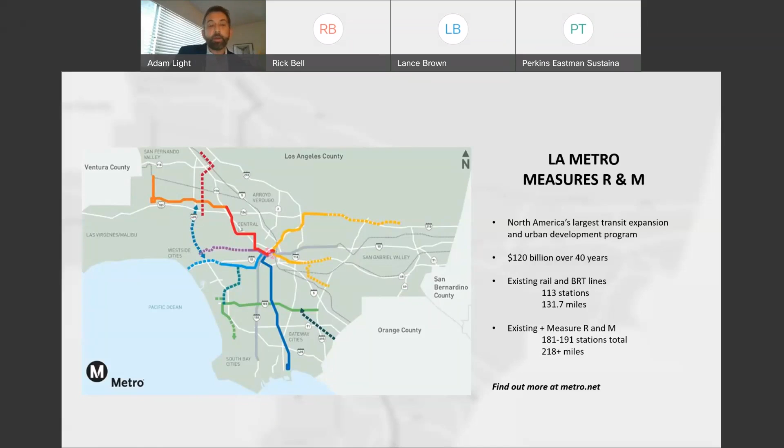All across the county, currently we've got existing rail and BRT lines that have 113 stations and extend for over 130 miles. With our Measure R and M projects, we'll have anywhere from 181 to 191 stations, potentially more, and 218 miles of transit corridors. This is just a cartoonish map to give you a quick idea of the extent of the transit system we're building across LA County. It doesn't include everything, but just to give you an idea.

Metro has a long-range plan, a strategic plan called Metro's Vision 2028, and today there are 5 goals to that plan. Today we're focusing on the second goal, which is to deliver outstanding trip experiences for users of the transportation system. If we don't get people on transit, it's not going to help our environment, and it's not going to help people get to where they want to go.

So we want to make sure we're taking people where they need to go in the best way possible on a state-of-the-art system. There's a number of things we're working on now. We just transitioned from a color-based line naming convention to letters. We wanted to emulate New York City in that way, since you've got a great system of naming your lines. As our system is growing, we've adopted that. We've also got quite a number of new Measure R and M transit corridors opening in the next 6 to 7 years in time for the LA Olympics and to better serve our existing residents and visitors.

Metro has a new focus on equity and customer experience, making sure that we are serving the folks in our county that need the transportation the most, who are the most vulnerable, and that we're supporting and helping the economic development of equity-focused communities.

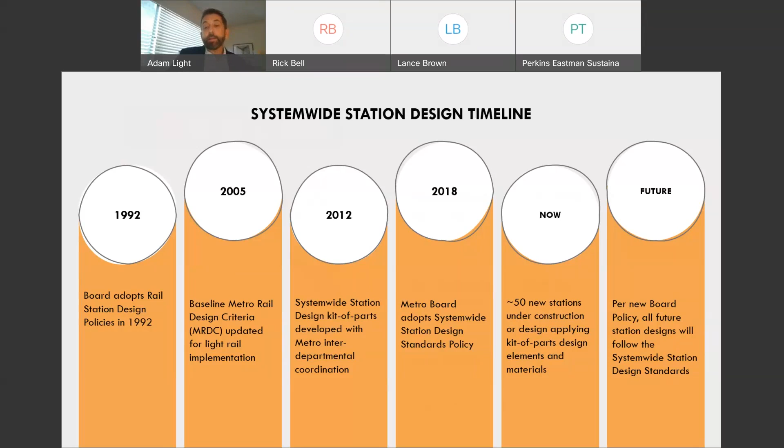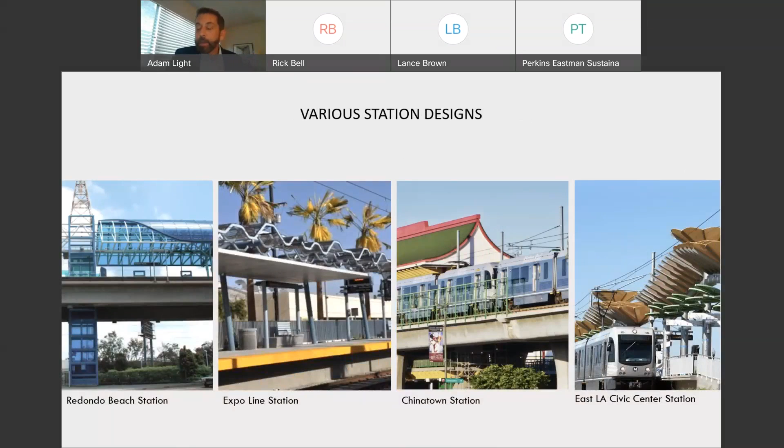Currently, we've got approximately 50 to 60 new stations under construction that are applying the kit-of-parts design elements and materials. The reason we developed it is because on Los Angeles' system, we have a very exuberant collection of architectural styles. This shows a few of those at Redondo Beach, a station that looks like a wave, in Chinatown, a pagoda-style shelter, and out in East LA, sculptural elements that mimic palm trees and other elements that are in the community.

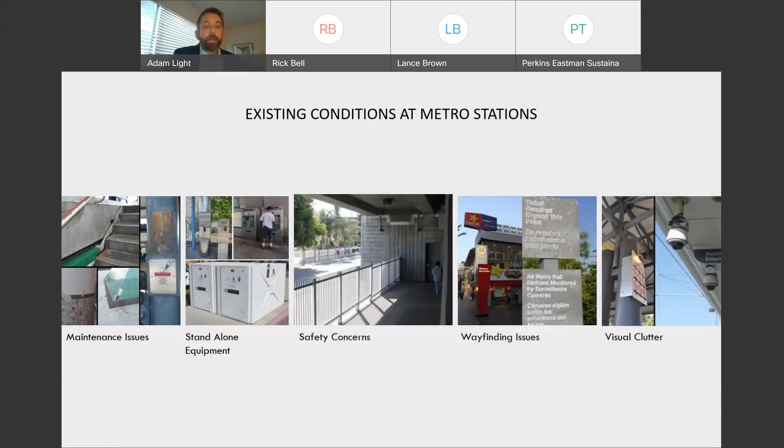So in trying to maintain all of these different architectural styles, we had trouble keeping up with different architectural elements and finishes. We also had station platform designs that resulted in dark areas and isolated spaces that our customers don't really feel safe in. A lot of our elements, signage, and equipment was hard to maintain and keep up to date. So we wanted to move to a more modular system.

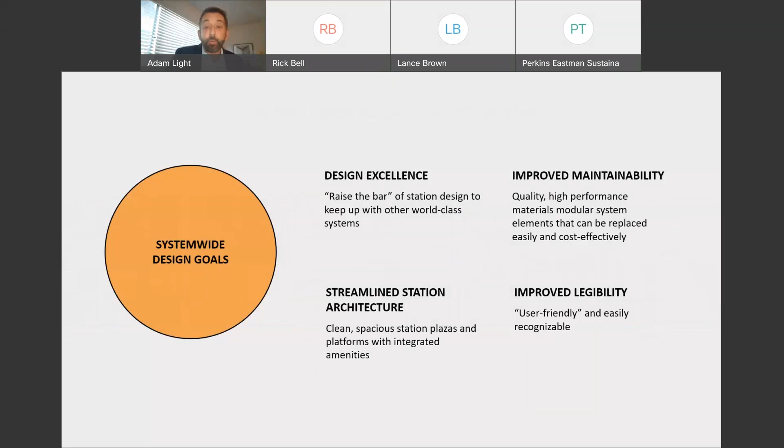The idea with our system-wide design goals is that we push design excellence, we raise the bar in design, we improve the ability of our agency to maintain our stations at a high quality, and that we streamline our station architecture so it's easy to recognize from a distance, easy to move through, intuitive, and creates a better user-friendly experience for anyone using our stations.

So what we did was we looked at global best practices around the world, in DC, in New York, across Europe, in Asia, and we found some commonalities on the best station architecture and best practices around the world.

What we learned from these best practices is that the materials you use in a station obviously have to be durable. They have to be flexible to be used in different ways for different station types, different ridership numbers, and different communities. They also have to be accessible. The people who rely on our system the most need to be able to access the station and access the trains. All of that is for nothing if we are not able to maintain it.

What we also learned is that the best stations are well integrated. All of the features and customer touch points are well integrated into the station architecture. And ultimately, it's got to be cost effective to design, to build, to operate, and to maintain.

So what we found through this best practices research is that there are 3 basic materials found in the best state-of-the-art transit stations, and that's architecturally finished concrete, brushed stainless steel, and structural glass.

But we wanted to put a design together that actually reflected LA and the unique things about our community. We wanted a light, air, and openness feeling to our stations so that people can enjoy our climate, but that also protects riders waiting on a train from our hotter months, hotter temperatures, and direct sunlight. We want to enjoy that climate, but we also have to provide some protection from it.

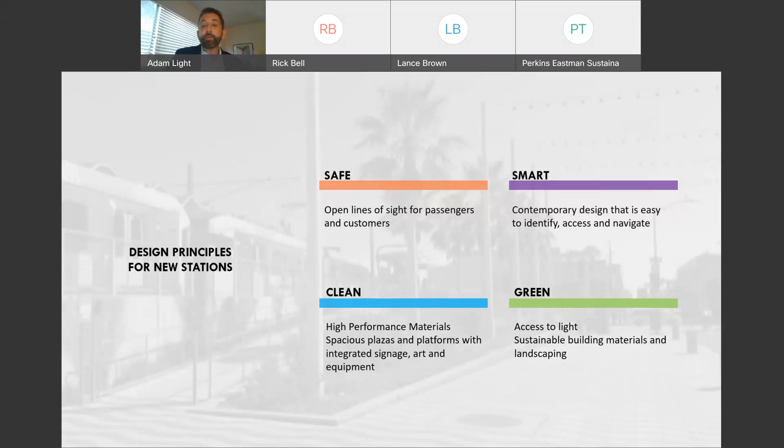Using those high-performance materials means we have to replace materials less, and using sustainable landscaping materials also contributes to the health of the environment. In terms of our principles, we have consistent architecture and signage that's easy to recognize station to station, but we provide variability to each station through art and landscaping. Our art program ties each station to the culture of its surrounding community, and the landscaping is tailored to each microclimate that we have in LA.

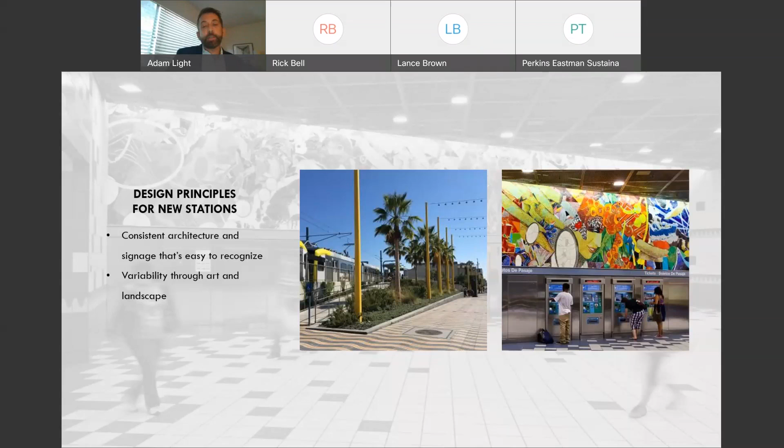If you're at the ocean, it's a lot different climate than if you're in the San Fernando or San Gabriel valleys, where it's much more dry and hot.

So this is just to show you some photographs of how we put this kit of parts together: the glass, the concrete, and the stainless steel.

This is a rendering of a subway station entrance. We have a bunch of these under construction right now along the Wilshire Boulevard corridor, downtown, and along Crenshaw Boulevard. This uses the glass panel system to construct an entry pavilion.

The same type of materials are used for the elevator accessible entrance. We use stainless steel for our bike racks, for the enclosure that secures the station, for the columns. And then we use a 3-toned concrete pattern for the paving of the plazas.

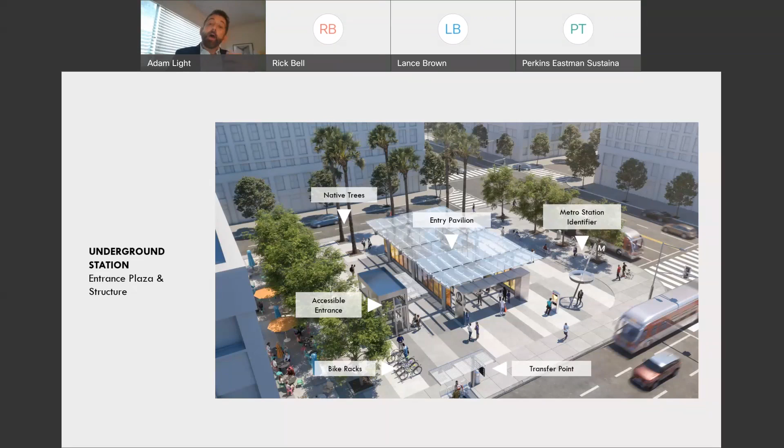What we found is that over time, it's very difficult to keep up individual pavers or very intricate patterns of paving. So we went to a randomized 3-tone gray concrete paving pattern that, so long as it's patched in a regular rectangular shape, future repairs to the plaza surface are camouflaged through that randomized pattern.

So this is a close-up, and you can see here the art glass panels that we provide at the entrance to our underground stations. This helps welcome people to the community as they exit the station, as well as immerse our riders in art as they go down into the underground station.

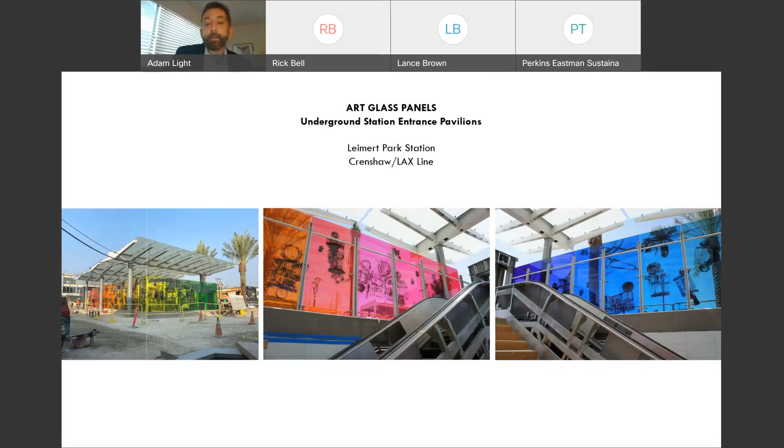So it's a very colorful, beautiful art piece that will welcome people to the community and instill a sense of pride in the surrounding community and the artists that come from this area.

So these art pieces are meant to tie the station to the community and immerse our customers in beautiful art.

This is a rendering of our at-grade stations, and again, we're using the kit of parts with the stainless steel and the glass panels. To the right of the rendering, we're using that same panelized glass panel system. It's a fritted glass that provides shade.

Depending on where you are in the county, that frit may be more dense depending on how hot the climate is and how much density of shading we need.

You can also see we've got art panels that are integrated into the architecture and welcome people to the station. They are out of the touch zone to prevent vandalism, and they're highly visible to the surrounding community. So these stations become art pieces and architectural pieces within the midst of the community.

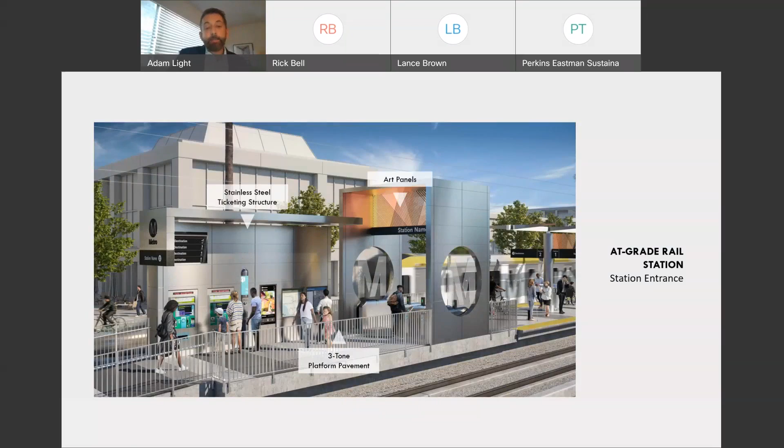So we're really excited about these new at-grade stations. You can also see the stainless steel ticketing structure, which if you look at it close up, streamlines all of the equipment that people need to ride the system, from navigation to next train arrival to the ticket vending machines, customer assistance telephones, and static map cases, as well as integrated touch screens that allow people to navigate the system.

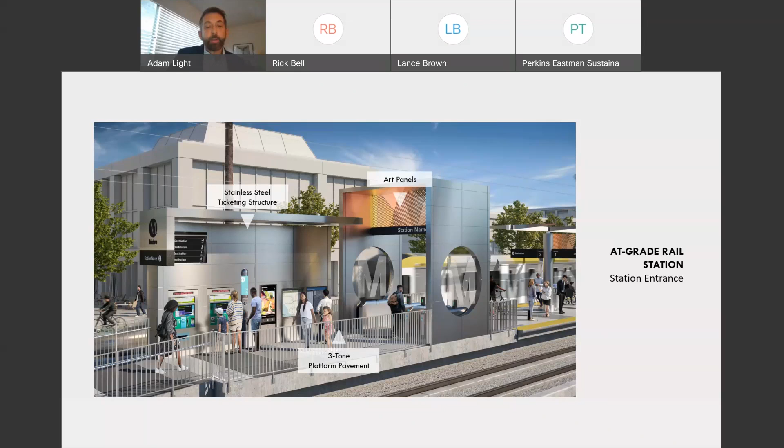We wanted that in a streamlined enclosure so that we don't have places for trash to gather, for people to stash things, and we just wanted a much more state-of-the-art appearance to the entrance of the station.

This just shows some mock-ups of the 3-tone concrete paving and the integrated LED lighting fixtures that are in the outriggers that either support the canopy or provide lighting on the portions of the platform that don't have a canopy. And this is to show you some of our new downtown stations that are under construction and should open next year.

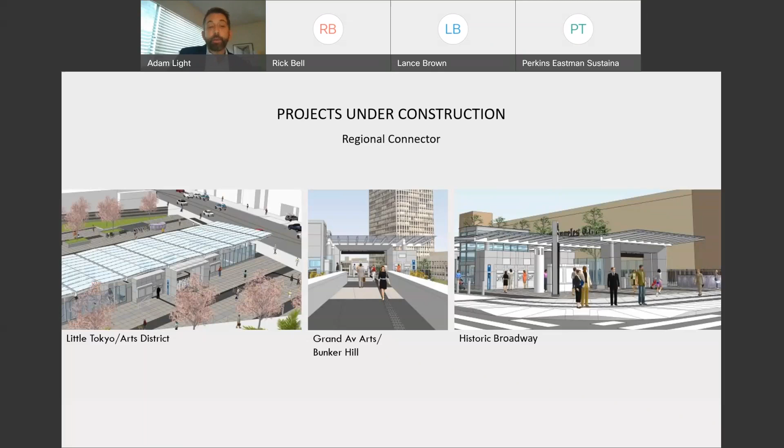This shows how the kit of parts can be put together in different configurations to respond to site conditions. These stations don't have concourses for the most part because of the shallowness of the alignment through downtown. So we had to put a lot of the customer amenities for these underground stations at grade, and we were able to use the kit of parts to create a different configuration.

With our design standards, it's a living document, so we want to continually upgrade and update what we're doing. Our team led an effort to develop integrated station design solutions along with our leads from each of our agencies and departments, from architecture and engineering—who was a very close working partner with us, Aspet Davidian, many of you may know. We worked closely with him to develop these new standards and design solutions, as well as our sustainability department, our arts and design department, operations and maintenance, and program management.

So what we wanted to do is make sure that this effort was coordinated, because so often in agencies you have different people in different departments coming up with design standards or solutions without good holistic coordination. We also wanted these solutions to be flexible so that we can implement them at current stations as well as new stations. We also wanted to make sure that they meet requirements that are currently in place by government agencies, but that we also anticipate changing in the future.

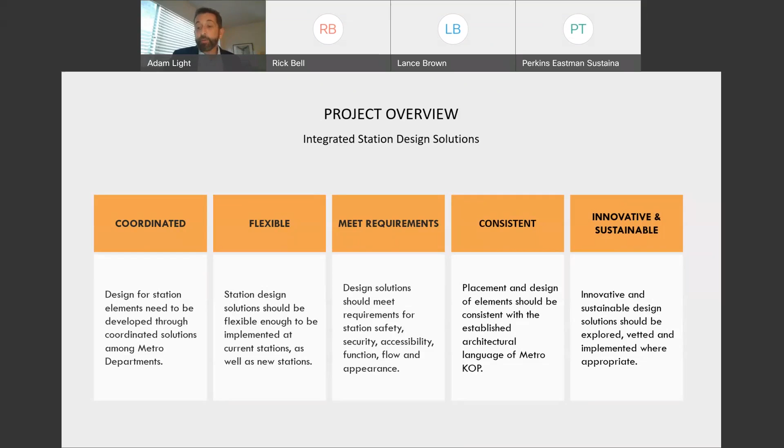We wanted them to be consistent in terms of placement and materials so that they pick up a consistent and cohesive architectural language, and that they're innovative and sustainable across time, so that they're as good tomorrow as they are today.

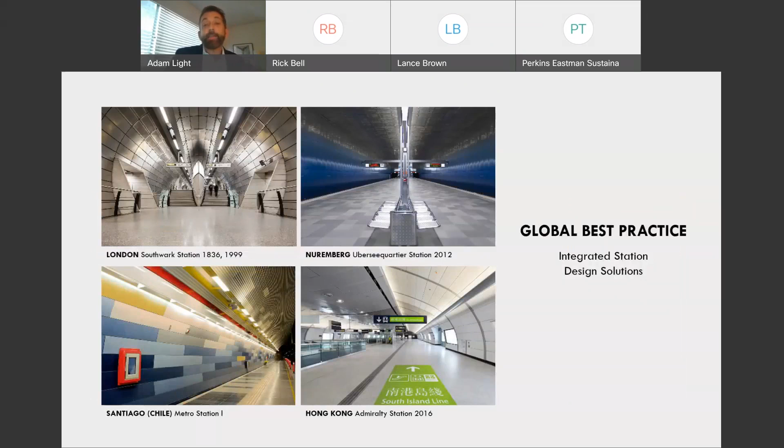So we looked at global best practices around the world: London, Nuremberg, Santiago Chile, and Hong Kong, and many other cities, to look at how the best designed stations are streamlined and how that can apply to the metro system. In looking at all of the design elements, we had about 13 different design elements we were looking at updating or adding to our design standards.

About 5 of those really focused on sustainability, because not only is transit itself sustainable, but we want our stations and everything we build to reflect the highest level of sustainability that we can support as an agency. So furnishing, acoustics and noise, landscaping, lighting, and solar panels were all major efforts in terms of making our station environments more sustainable. This is just to show you some of the furnishing elements that we developed through this project.

These are our new benches and trash cans. The benches have only 2 points of contact with the floor. It maximizes seating and comfort, and they're contoured to be more comfortable.

They're also transparent, so we can see if someone stashes something that's unsafe in the station underneath a bench. They're easy to clean under, easy to move and replace, but highly durable since they're stainless steel, so they don't need painting and are easy to repair. The seats themselves are modular and can be easily replaced one seat at a time as necessary.

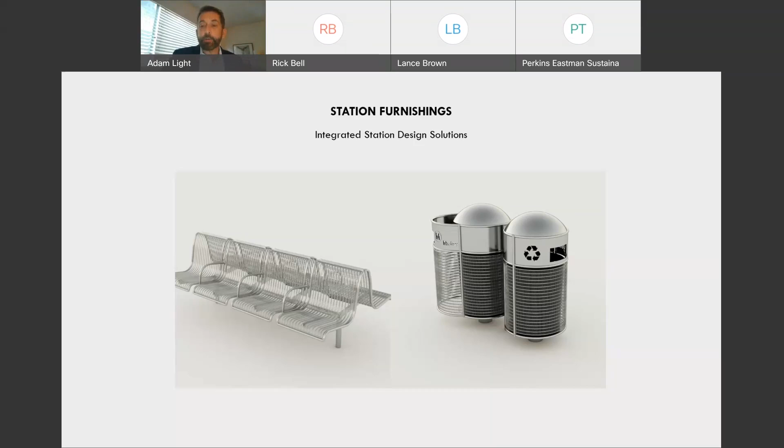The trash cans are designed with doors that make it easy for our maintenance staff to just pull the can out and the bag out, then push it back in and secure it. It has a small opening to prevent people from rummaging through or dumping their household trash in our trash cans. It also has a mesh feature that makes it easy for robot scanners and similar devices to scan for bombs and that sort of thing. And it's on a pedestal to make it easy to mop around.

With our landscaping, we pushed for California native species that are tailored to each microclimate in the county to provide beauty to our station plazas, as well as shading where our customers need it while they're transferring to other modes of transportation, such as bus or pickup and drop off.

This shows you a typical layout of a station plaza where we have shade trees at the edges next to the sidewalk where people will be waiting at bus stops, but also ornamental landscaping at the rear that doesn't provide as much shade, to discourage folks from camping out, but also provides a visual cue from a distance where our stations are, as we have used California fan palms as signifiers of station locations since we built the E-line out to Santa Monica a number of years ago.

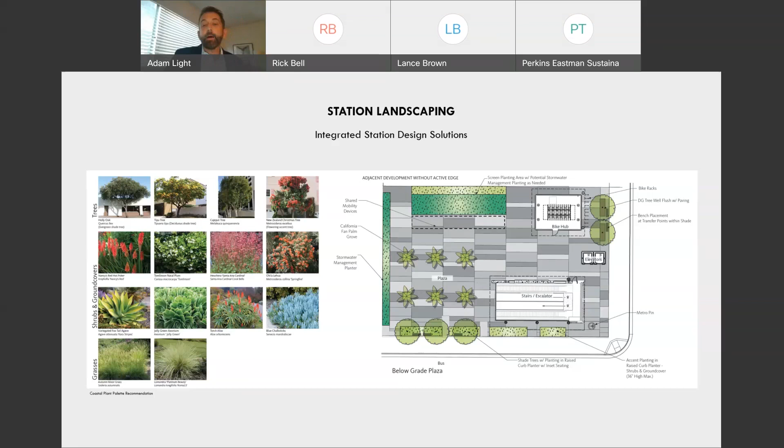Our new station plaza designs also have stormwater capture areas, and again, we use California native species or non-native species that are non-invasive and drought tolerant.

We also looked at station lighting, the most high energy efficient fixtures that we could find that are durable, that are flush mounted to ceilings to avoid places for dirt and dust to gather or birds to perch.

We've also developed a design standard for our plaza lighting that makes it very easy for our maintenance staff to just get a ladder and change out the fixture, but reflectors above that provide a soft, even lighting for the plaza surface. We've also been looking at integrating solar panels into our kit of parts so that the glass panels on our canopies could be substituted with glass solar panels.

We've been working closely with our sustainability department and Gensler and Arup architects to develop a system of solar panels that's modular and can be easily installed and integrated into our canopy designs—solar panels that will be beautiful, provide shade, as well as generate sustainable energy.

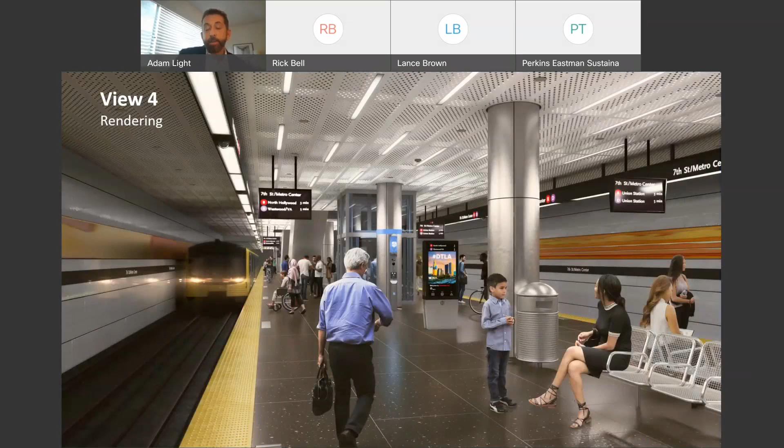This is our heavy rail platform for the B and D lines with the new application of the furnishings, the flooring, all of those elements, the customer information telephone, and the digital touchscreens all integrated together into an environment that's much more pleasant to be in, more secure, easier to use, more comfortable.

This is similar to what the Beverly Hills station will look like on the interior, again applying those integrated station design solutions. We're working right now with the projects to see which of these new elements we can integrate into their current construction contracts.

This is one of our freeway stations on the 105, and what it would look like if we introduced sound walls and new public art and lighting. Right now these stations are extremely noisy, and we're looking at ways to improve the experience at these stations.

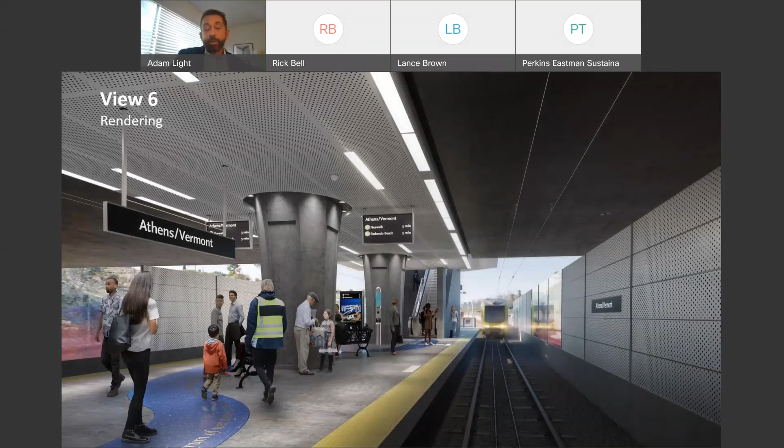When we're looking at stations, we also look at how we can use the property around it that we end up purchasing for construction laydown areas and that sort of thing to create transit-oriented communities. I'm just going to run you through about three of these projects.

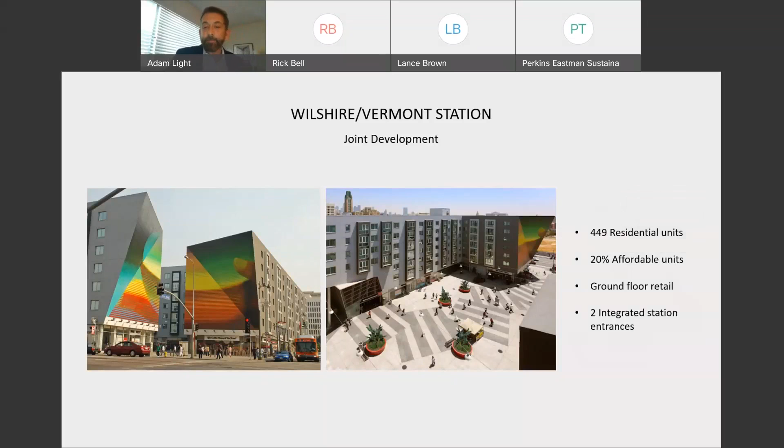This is a development we did a number of years ago at Wilshire and Vermont, where we had 449 residential units, 20% affordable, ground floor retail, and 2 integrated station entrances. There's a really nice public open space and art pieces that go with this development, and some of our colleagues at work actually live here, so we're very proud of this project.

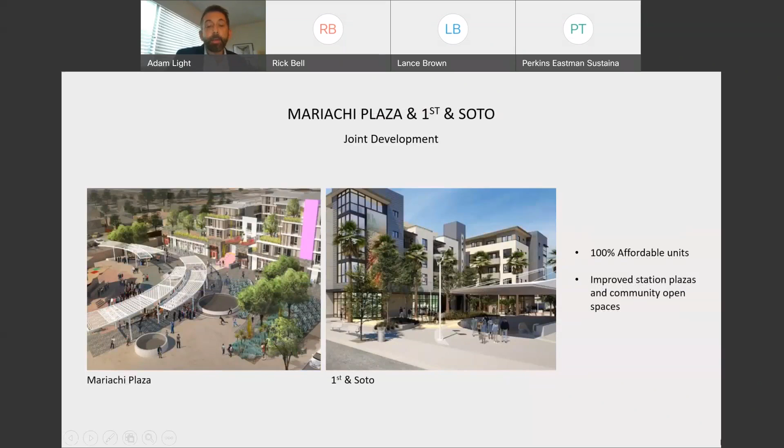We currently have some other projects under development in Boyle Heights and East LA. These are 100% affordable projects, and they provide improved public open space and community open spaces. So we're very excited about these as well.

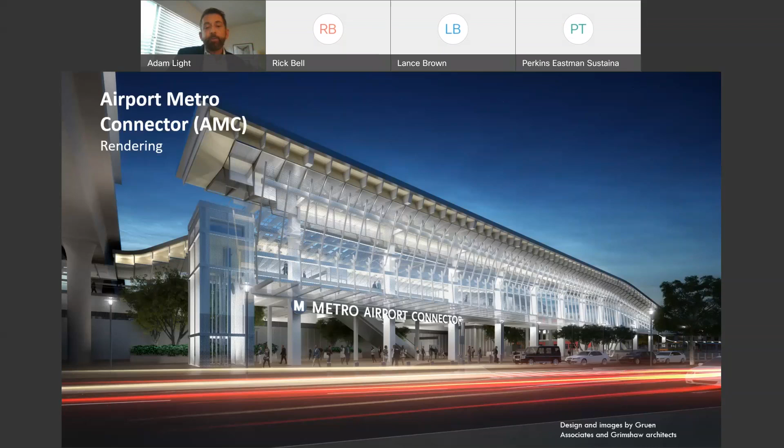You may have heard about the airport metro connector station that will tie the metro and regional bus systems and our light rail system into a new people mover, taking airport workers and passengers to and from the airport and connecting them to the transit system. These images were developed by Gruen and Grimshaw Architects, and we've been working closely with them. We see this sort of as our Union Station West. It integrates a lot of sustainable elements: a large bike hub, sustainable landscaping, a lot of canopies for cooling, and also to help with sound attenuation with the planes flying overhead.

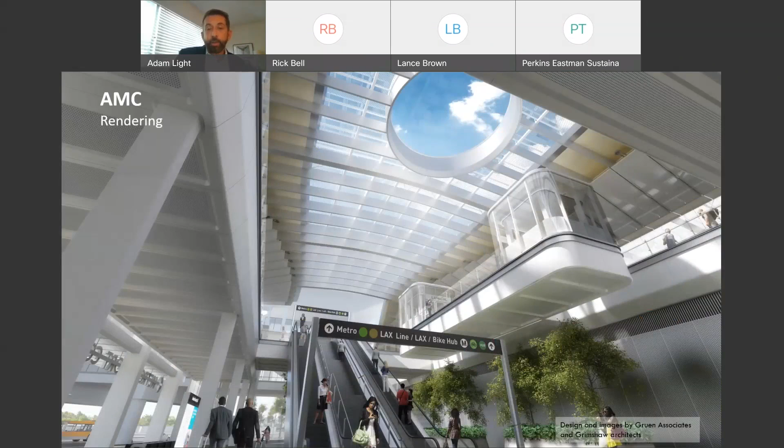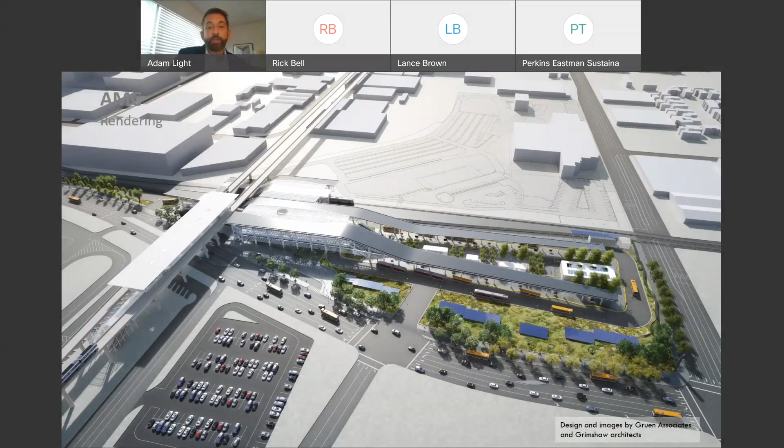This is the interior of the space that lets natural light in, but filters it to keep things cool and provide some sound attenuation as well. And this is a bird's eye view of the facility. You're looking west towards the airport, north is to your right. You can see we've got a large stormwater management area where we're also integrating solar panels and using sustainable materials, both landscaping and high performance materials, for a station that's easy to maintain and pleasant to be in.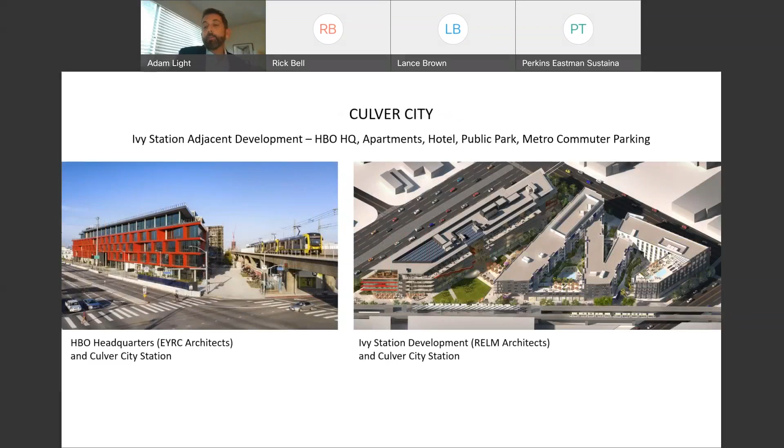This is in Culver City on our newer E line. Our TOC joint development team worked with property owners in two cities, the city of LA and Culver City, to develop a mixed-use project that includes HBO headquarters, apartment units, and a hotel, as well as new public open space that ties in directly to the station.

We also worked closely with downtown Santa Monica on the E line to develop an urban design aesthetic that connects riders from the beach and shopping in downtown Santa Monica to the system. This has been a very successful station, highly used by tourists and people who live in the county who like to access the beach and shopping in Santa Monica.

So that kind of wraps up the LA portion of my presentation. Would be happy to take questions or discussion. I also have some information on Toronto, which took a very different approach on a recent project, but we can talk about that time permitting.

Thank you, Adam. Great presentation, and I'd love to see the Toronto images. Maybe they could be in response to a particular question from either members of the audience or in our discussion.

I'm astounded by many things in your presentation, including your opening discussion of the finances. A 120 billion capital plan is phenomenal. The MTA in New York has something like a 54.8 billion capital plan for the foreseeable future, 2020 to 2024, but it's not necessarily completely funded. The issues of funding and governance are bedeviling in New York, where the state has a lot to say about it. With county-based LA County transit, and your links to other municipalities, as you're describing, maybe Long Beach or Santa Monica -- Culver City is independent -- is any of their funding from the state, or is it all raised within the limits of the city of Los Angeles, or the county rather?

Yeah, it is county-based. The sales tax revenue is county, it's within the county. We do also rely on state and federal funding for that $120 billion. It's a combination of those things, spread out over 40 years. Given the infrastructure we have to build to cover this huge county, it's not near enough. It really isn't.

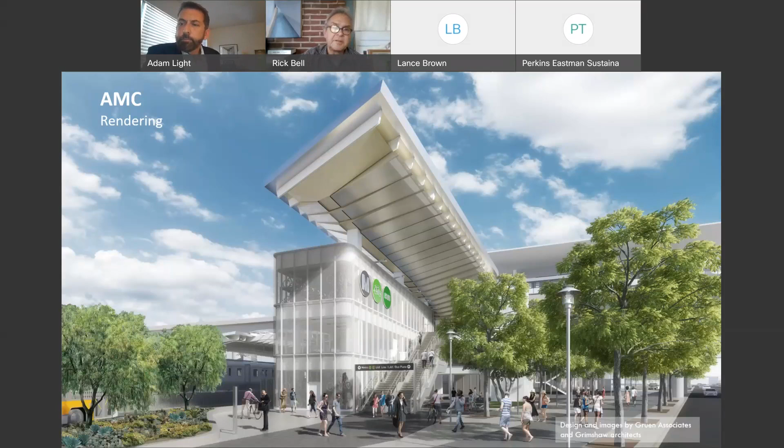I won't ask the dollar per mile number. We certainly looked a lot in New York at comparisons with Paris and London and other cities around the world in terms of how costly it is to build in New York. That may not be the case in LA, where the system is at grade, at least stations are, and there's less tunneling. But on scale, you're talking about going from 113 stations to as many as 191. New York, depending how you count, has 424 or 471 stations, depending whether you count transfers, many of which have been there forever. The ability to add new stations has been quite difficult in New York, although the state's modernization plan is comparable. I think I saw one of our canopies in your system.

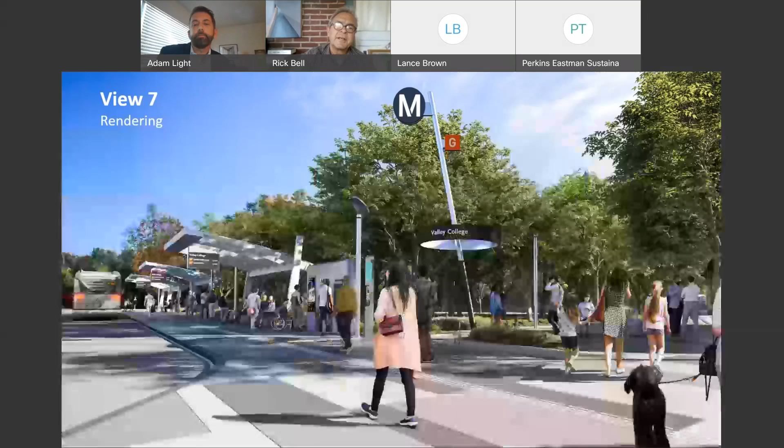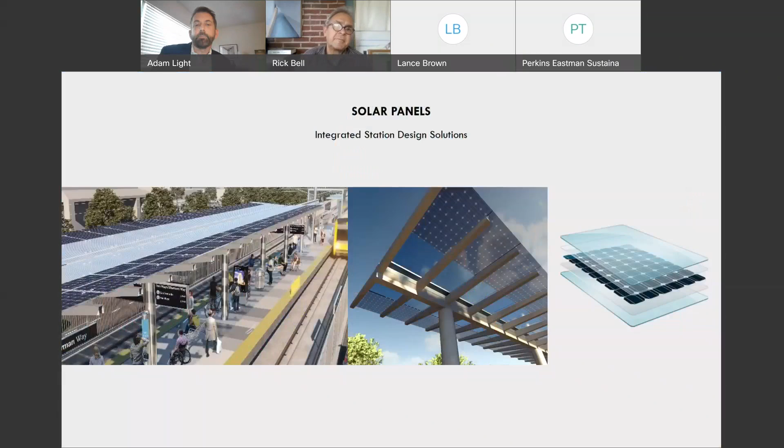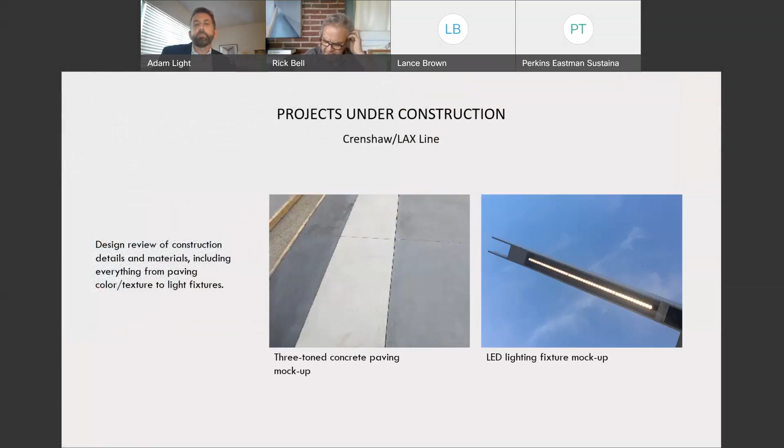I'm going to switch, because we're talking about environmental issues today, from the fiscal to a question from a member of the audience, Burkhart, who works at MTA Transit, asking about material selection and environmental properties. To paraphrase: glass is not all that environmentally friendly. Are you looking at carbon emissions, recyclability? What are the attributes in material selection? You had mentioned lessons learned from best practices that talked about, among other things, durability. But could you focus more on material issues and what some of the trade-offs were, since you were looking a lot at stainless and concrete, also not that environmentally great?

As discussed at the beginning, we were having a lot of problems with durability. If the materials you use don't hold up or function as intended, they end up in the landfill. So there's a trade-off between a material whose production may not be as sustainable, or may not be made out of recycled materials. We do look at using recycled materials where it makes sense—for instance, in the terrazzo flooring we're looking at recycled glass and mother of pearl and other recycled elements to create a durable material that lasts. With the glass panels, that's why we're looking at integrating solar panels, and right now we're looking at solar panel types that are the most sustainable or least damaging to the environment. We focus on durability and cost-effectiveness, because if we're not able to build these lines cost-effectively, they're not going to get built, and we're not going to be delivering transit that helps the environment. So those are the trade-offs: are you going to build a cost-effective system that looks great, that people want to take, with durable materials you don't have to constantly replace? Those are the decisions and trade-offs we make.

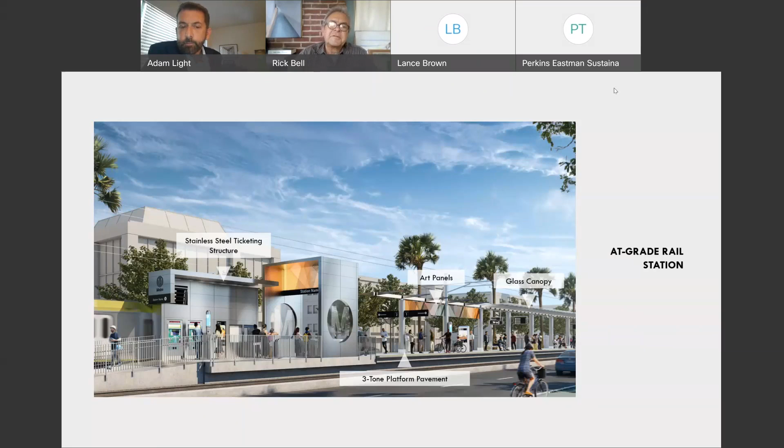Congestion pricing in New York is not a response to the pandemic. We've been talking about it for a long time, and maybe it will finally happen. But California, Los Angeles at the top of the list, has notoriously been car culture. The beauty of the stations and the attributes of the system you're describing are alluring. Does the pandemic work against that, or is congestion on the freeways just so bad that this is a response to how public health, safety, and psychological well-being are assured?

What's been the impact of coronavirus in LA?

Last year it was tremendous because our funding relies heavily on sales tax revenue, and to a lesser extent, fare revenue. When coronavirus hit, we stopped collecting fares on buses to protect the bus drivers, with all entries at the rear. People were riding buses more than trains, and in fact 80% of our ridership is on bus, not rail. So we took hits from the economy slowing down, the loss of tax revenue, and the loss of ridership. At the peak of the shutdown, I think we were down 90%.

We're back up in the 60% range, somewhere in there, but we are looking at restoring our full service in September. We've also realigned our bus service through our Better Bus initiative to make that service better for our customers so we can get back on track.

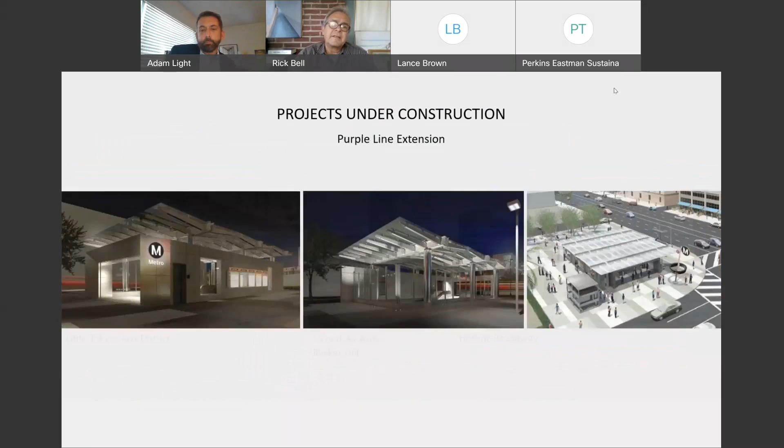My last question might be about comparables. You mentioned and had a slide that showed images from a bunch of other cities, including London, Nuremberg, and Santiago, among others. I know that when I travel with my students from Columbia's engineering school to London and Paris and Los Angeles, we've looked hard, and with you a year and a half ago, at system changes and station design. Cities learn from each other. You mentioned when we were talking briefly yesterday that your experience in Toronto was formative in terms of some of the environmental initiatives that you're able to bring with you to LA. Are there particular images, whether from Will Alsop's projects or others in Toronto, that you'd like to close with?

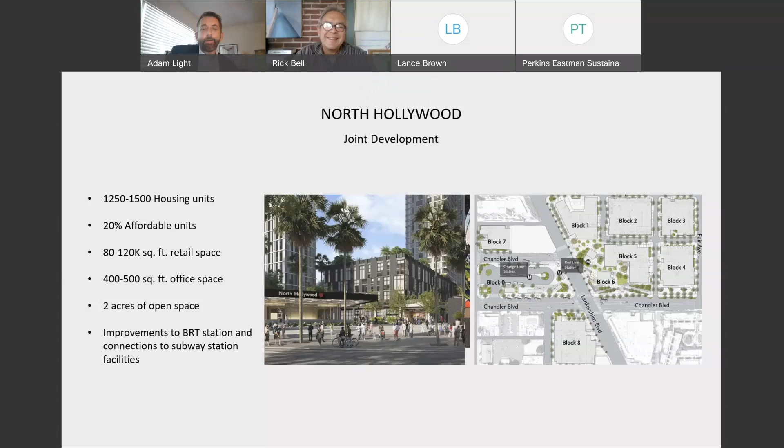Yeah, sure, let me just pull you through. Not many—it's 12:59, and I'd like to sum it up. Great, we'll go through those. Sorry for clicking through this.

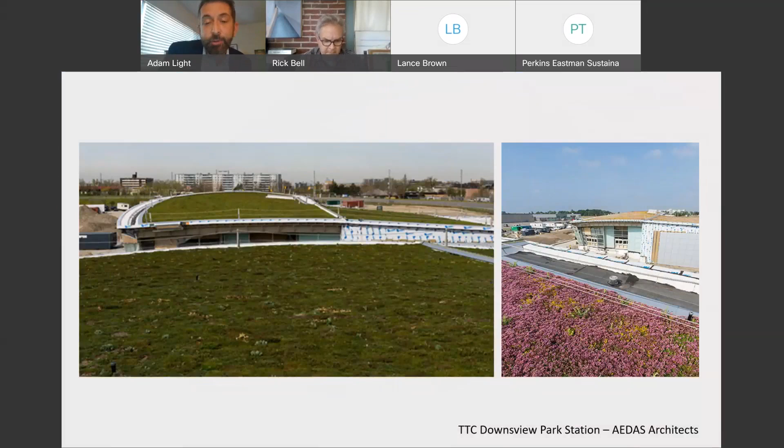So these stations were no exception. This is the Downsview Park Station. It's on an old Army base, being redeveloped as a national urban park and housing for about 30,000 people and about 10 million square feet of commercial space. So this new station would provide a subway station that interacts with the regional rail, commuter rail system, and having this sort of blend in and look almost like a hillside within the park. This is the built function—you can see it changes color during the seasons, and it's truly a beautiful station.

This is a Will Alsop station. The previous station was designed by AEDAS—I believe they're out of Dubai. This one was developed by Will Alsop, at Finch West, connecting to a new light rail line under construction, with a large bus terminal as well. The idea with these stations was to allow in as much natural light as you can, get it down into the station, and integrate vibrant public art as part of the customer experience.

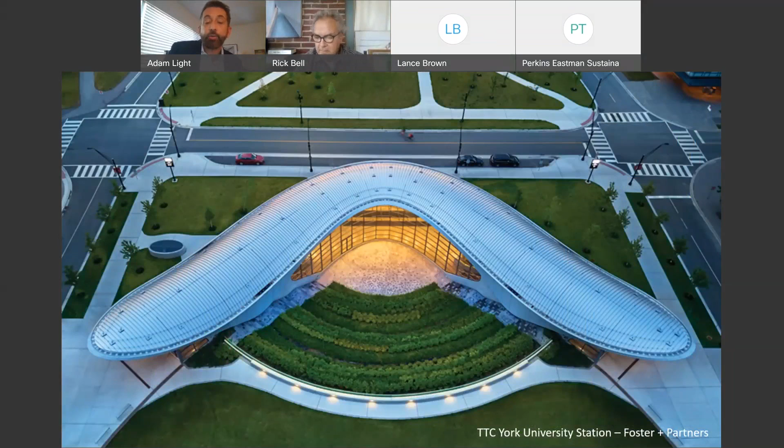This is the station in the middle of York University, a large university in Canada with 50,000 students and a very good business school. It's right in the middle of the quad, integrated into the site with a landscaped amphitheater shaped entry.

This is another Will Alsop design at the north end of the York University campus that uses Corten steel and a lot of glass to allow natural light into the station environment. It's a really beautiful station, and like Will Alsop, is a very exuberant, quirky design.

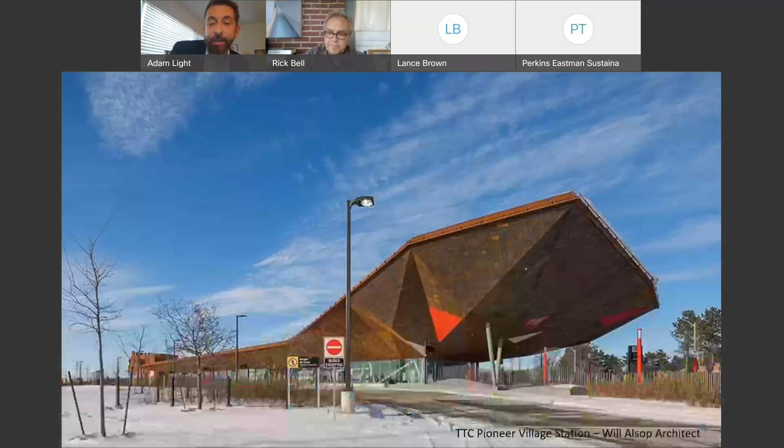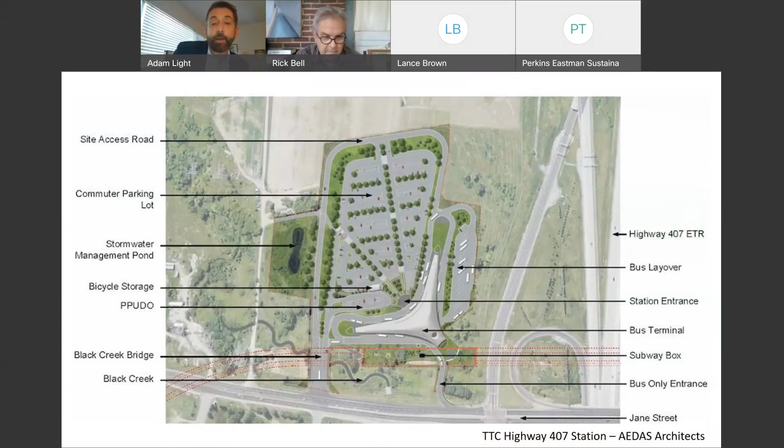This is a commuter station that was part of the line extension in the middle of a couple of freeways and a large arterial. Not a lot of opportunity to walk into the station, so it's a commuter station bringing regional buses in and providing commuter parking using green parking standards.

This was also designed by AEDAS, with the bus terminals on top and the subway station underneath. This is seen from an arterial road going by the station.

This is a station in Vaughan, Ontario, the suburb just north of Toronto. They're building an entire new downtown with about 25,000 housing units and millions of square feet of commercial space, parks, schools, and institutions. This was designed by Grimshaw, using local landscaping, sustainable design, and a lot of natural light that gets into the station.

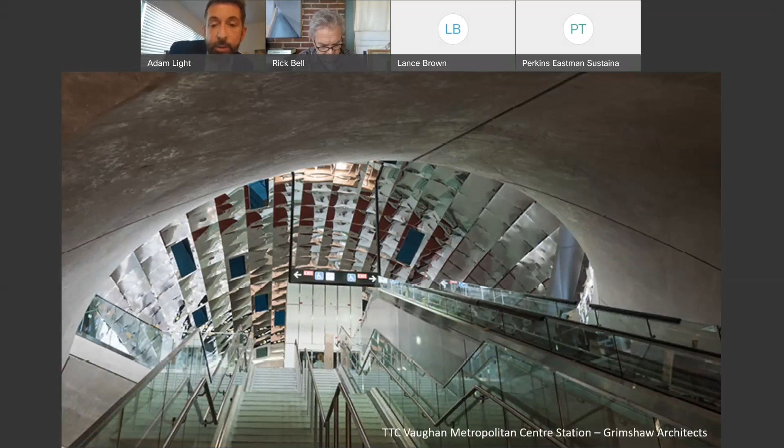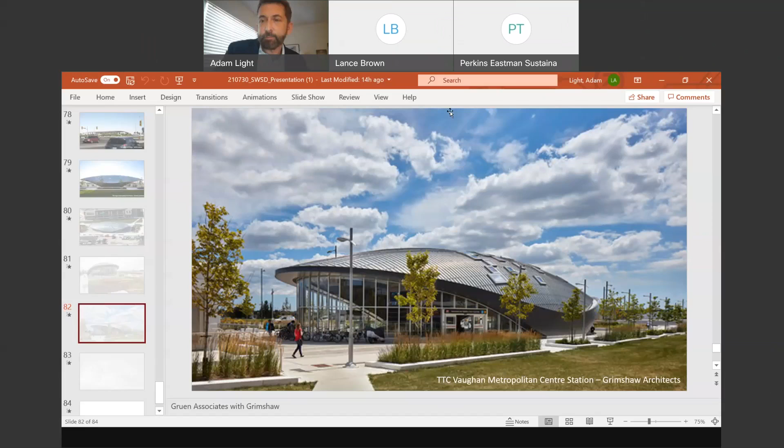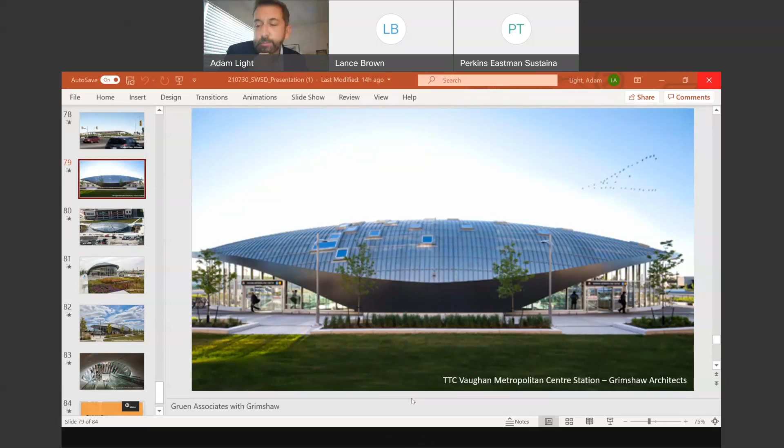Well done, gentlemen. Thank you very much. Thanks again, Adam. Thank you. Thank you so much, you all. This was really fun, it's a real honor to be here today. So thank you again, it's a beautiful presentation. Of course, you present an enviable system, especially for those of us who have one that's basically a constant retrofit to try and get there. But these are great. Well, yeah, there's a lot of that for us too. And thank you very much. Stay well. Okay, you too. Ciao.